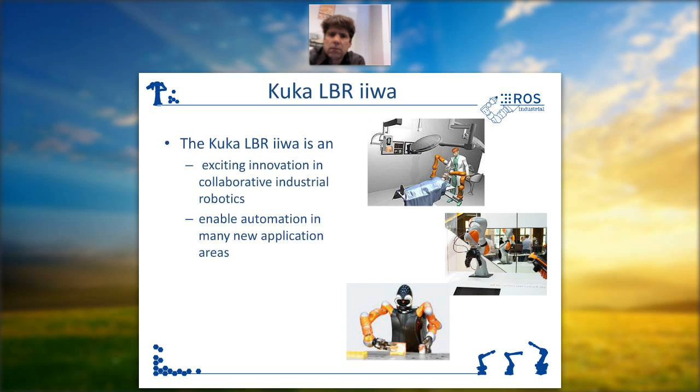So I'm going to give a simple overview of the Kuka robot. Michael will do a better job of this, but I think we can all agree that the Kuka LBR is an exciting innovation in collaborative robotics, which is also an interesting area to be working in.

The idea is that a platform like this can enable so many new applications. It's very exciting. That's the reason we decided to hold this meeting - a lot of people from industry were coming to us saying they think there's a lot this platform can do, but they'd like to learn more, and know if and how ROS-Industrial is involved in that. So it's kind of the motivation for this meeting as well.

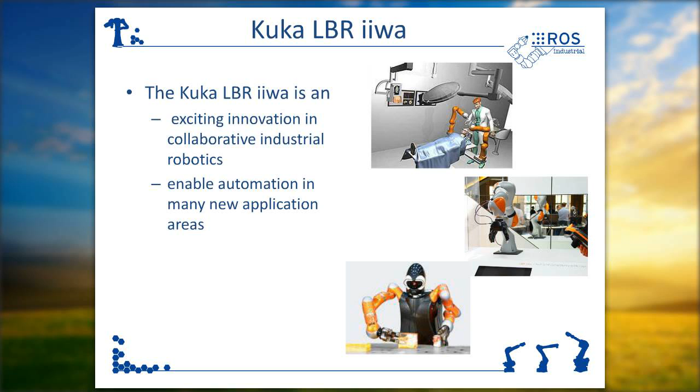But I'm not going to go too much into it because, quite frankly, I don't know all the details of the LBR platform as well as Michael does. So just so everybody knows, this is the platform we're focusing on.

So with that, I'm going to turn the discussion over to Michael, and I assume Clay is going to handle that for me.

Okay, am I live? You're live, Michael. You should have control of the slides also. Oh, how do I do that? There should be little next and previous buttons. If not, I'll change the slides for you. Okay, yeah, I'm not seeing next and previous. Oops, hold on. Oh, maybe now. And I was just informed that I am now a presenter.

Well, after the introduction, I need to have a brief apology because I'm not sure that everything you were told I'm going to talk about is what I'm going to talk about. What I prepared for today was a talk that basically describes a lot of the interfaces available on the Kuka lightweight robot. I was tailoring it to how you might make use of some of those interfaces to fit into a ROS environment.

I'd like to know right from the start - I prepared both for the LBR 4 Plus, which is the robot on the left, as well as for the new LBR iiwa. If nobody's interested in the 4+, I can skip right to the iiwa part. So could we somehow choose which way I should go?

I think the priority would be on the iiwa, just given that that's the platform that's going to move forward for industry use. Okay, all right. Well, maybe what I'll do is just flip through the slides and point out anything on the 4+ that's particularly important.

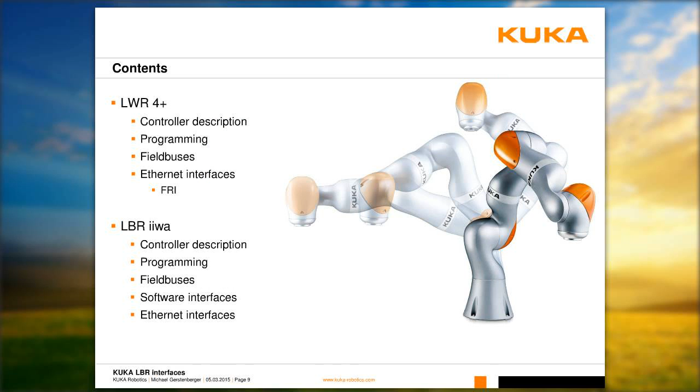All right, so this talk is structured first going through the 4+ and then the iiwa - a brief description of the controller platforms, then the programming languages, a list of the field buses supported on each platform, and then some of the Ethernet interfaces available on the 4+, followed by the software interfaces available on the iiwa.

So for the 4+, if you have a predominantly orange robot, that's a 4+ or before. If it's mostly silver with orange caps, it's a new iiwa, and if it's a white one, it's medical, which is also probably an iiwa.

This robot controller was based on our old KRC, based on that generation of controller hardware, the KRC2, and it made use of all the infrastructure that was already available. One issue was that doing things like impedance control, the main new feature of the LBR, was kind of a kludged-on add-on to how you normally did an industrial robot.

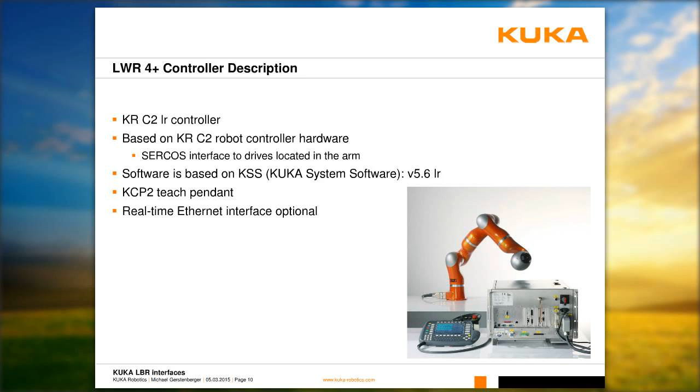As we'll see when we go through the iiwa, that software platform has been completely redesigned and is now a much more integrated system. The 4+ was programmed in KRL, and made use of system variables and data structures for accessing the special features of the LBR.

There was limited expandability, although there was a package called the Robot Sensor Interface, which allowed you to do real-time sensor control on the controller. It's a little bit like LabVIEW that runs directly on the robot controller.

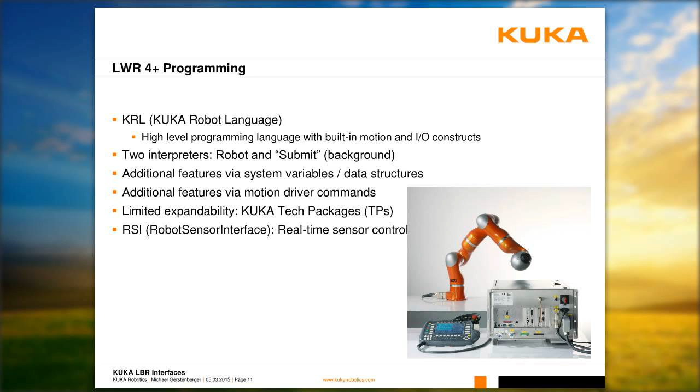Field buses that we supported on the 4+: DeviceNet was standard. You could get Profibus as optional, and if you wanted to do anything else, you needed to get your own bridge from one of those two networks.

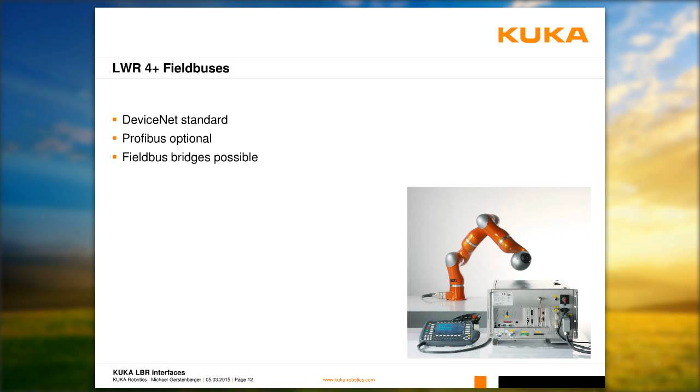Ethernet interfaces let you always access the Windows side of the controller from your network, so for things like file sharing and file transfers, that was available. We also had real-time software for communicating directly to your KRL program, and within the RSI framework, we had an Ethernet object that could stream data into and out of the controller. But most people, when they wanted to do any kind of streaming like that, ended up choosing the Fast Research Interface, which was designed specifically for the lightweight robot.

More on that coming up. So FRI was implemented using Ethernet UDP packets, and it provides a hard real-time interface to the controller. It allows you to directly access the motion system. The update rate could be as fast as 1 millisecond, and the slowest that we allowed was 100 milliseconds. It had two different modes.

Monitor mode allowed you to stream data out to a remote computer for logging or whatever purpose. Control mode actually allowed you to change the commands going to the robot, either joint angles or Cartesian positions, as well as additional joint torques or additional Cartesian force torque vectors. You could also change the impedance parameters every tick, so if you wanted to change impedance at a 1 millisecond update rate, that was possible.

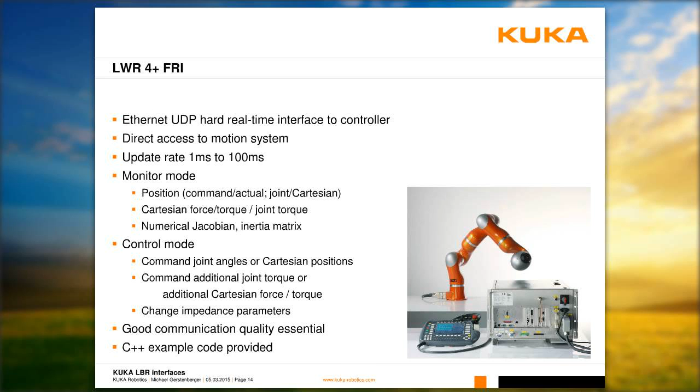As usual with a real-time or hard real-time system, good communication quality was essential, and we took steps to ensure there was good quality of the communication channel. We also provided some C++ example code, although that was just an example. I would not recommend it, since it was written for Visual Studio, in a hard real-time environment.

So what's different on the LBR iiwa? Well, the controller itself is completely new. It's not even called a KRC anymore, it's called the Sunrise controller. It's based on the other controller hardware that we have for our other new robots, the KRC4. It's a little bit smaller than the KRC4 Compact, which runs our small Agilus line, and that's because the drives are not in the box anymore. Unlike they are for the Agilus, the drives are actually inside the arm, so that makes the box a little bit smaller.

As I mentioned earlier, the software is completely rewritten, and it's called Sunrise.os. The teach pendant for this system is the standard smart pad that we use on our other robots, but if you've had a chance to use it, you'll see that the HMI is completely redesigned as well.

So how do you program it? This is another major change in how Kuka does robot programming. There is no programming on the robot controller anymore. All of your programming is done using a package we call Sunrise Workbench, installed on your computer. It's based on the Eclipse IDE, although there are some customizations, so if you really want full functionality, you should run it on a Windows machine. We've had some people try running it on a Mac, and there are some limitations there.

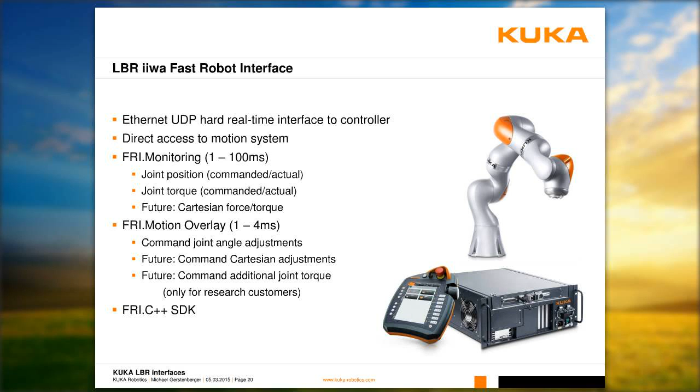The commanding side is now called FRI.motion overlay, intended to be used at 1 to 4 millisecond update rate. Currently you can command joint angle adjustments, and coming soon you'll be able to command Cartesian adjustments as well as additional torque, although that's only intended for research customers. Another component of FRI will be the C++ software development kit, basically like the example library we provided for the old FRI - a development kit for your remote computer to access FRI on the controller.

Okay, how are we doing on time, Sean? Looks like we got 10 more minutes.

So shall we check out some of these application videos? Yeah, we got 10 minutes.

There was one question about CodeBridge from Christoph, asking if CodeBridge was in the 1.51 release. I believe so. Actually, I'm just bringing up 151 on my computer right now to see if it's in the option list. There is, in the software option list for 151, a section called Tutorials for CodeBridge, so that makes me think it's included there.

Hi, this is Phil Freeman from Boeing. Curious, we'll be getting our iiwa here next week, I think. I requested some of the documentation and got the Sunrise OS documentation. How do we get the connectivity documentation and fast robot interface documentation? Should that be part of it, or will it be delivered with the robot? Do you know? It should have been part of it.

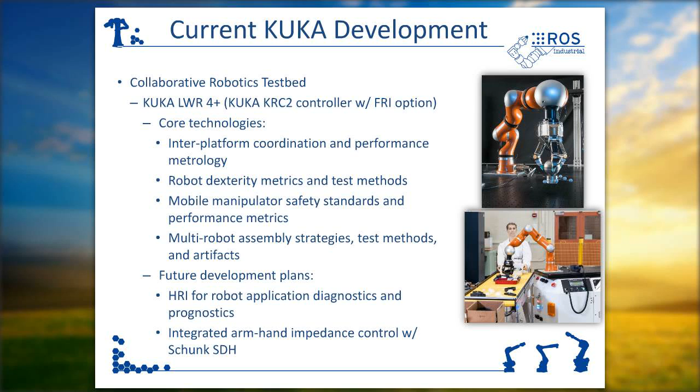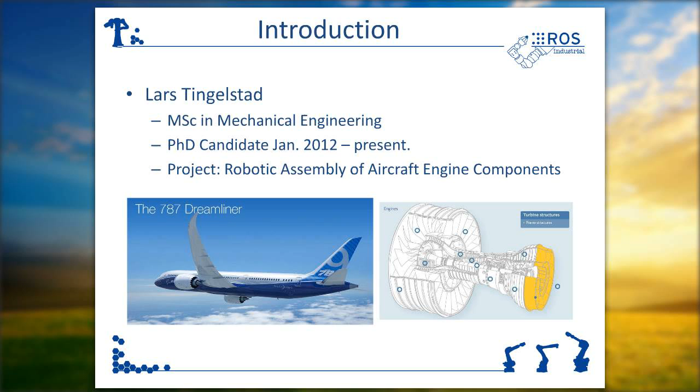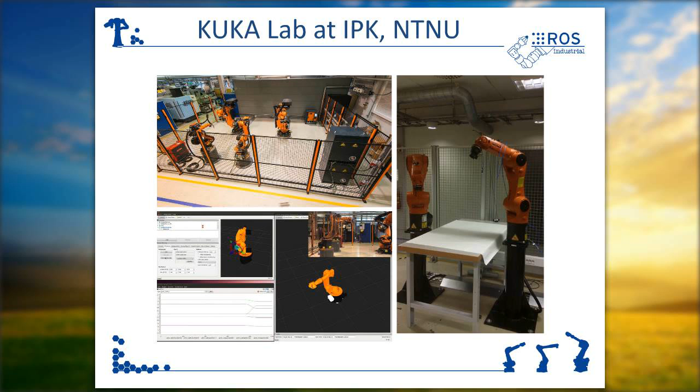So as I said, we have two Kuka KR120 R2500 Pro Quantec robots, the KR16 and the KR5, and then the Agilus robots. We use these robots for manufacturing purposes, typically assembly, welding automation in aerospace, automotive, subsea, and offshore industry, which is the main industries in Norway, as well as more traditional land-based industry like machine tending and those kinds of tasks.

The main thing I've been developing and trying to contribute to ROS-Industrial is the Kuka ROS-I driver, which I hope many will see the need for. It's based on a ROS control hardware interface implementation, plus support packages, URDFs, and MoveIt packages for our robots. The support package for the KR120 is already merged into the Kuka experimental package on GitHub, and the ROS-I driver is currently being tested and developed, living in a pull request you can see in the link. The goal is to get it rigorously tested in our labs and merged into Kuka experimental before summer this year.

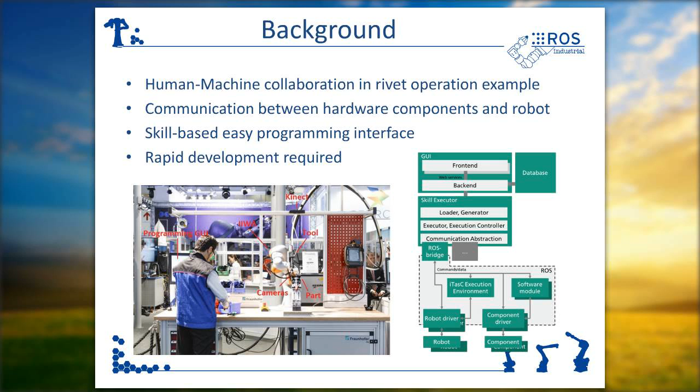Then the robot moves according to the position of the part. With two stereo cameras, we do a fine localization from the hole, and then we perform a riveting operation. So this is everything integrated in a framework, and the idea is that a normal worker can easily and fast program this system, with different robots and components, and the integration will be fast and cheap.

So we can go to the next slide. What I already developed is, in the iiwa part, a Java application which does an interface for a ROS node.

We have this command line interpreter. We send easy commands and we return the answer from this Java program. So it's like a normal TCP socket.

As Michael already commented, the iiwa has different controlling modes. I've already used the 4 different control modes, the normal control mode, but we had a problem: the frequency is very low and we cannot use it for reactive operations. So we already integrate the impedance controlling in the whole process, and we use the SmartServo and DirectServo mode to control, for example, a PID controlling.

So right now it's in C++, the ROS node program, and we have different interfaces, different topics, and we can also control everything with a self-defined ROS action.

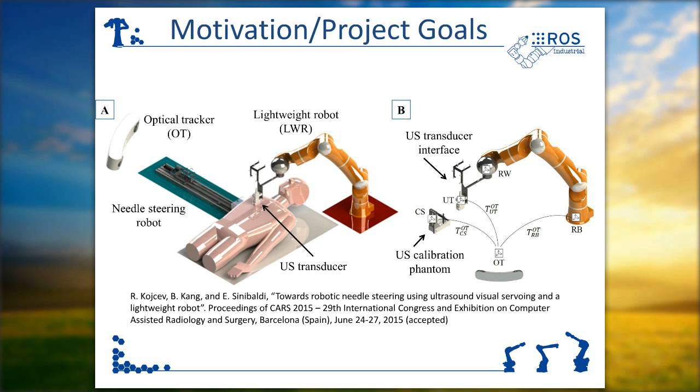This is seen in picture B, basically how the ultrasound calibration is performed. It's the ultrasound attached to the robot, and we have an N calibration phantom. For this, we used an open source software called Plus, developed by Queen's University, the PerkLab in Ontario, Canada, which enables us to use this robot to calibrate these ultrasound images.

By using this Kuka robot, we have better volume compounding compared to freehand calibration, because we are able to control the movement during the calibration, which is essential to minimize the error.

For example, during freehand calibration, we could get 0.6 millimeter reprojection error, while by using a robot we get a 0.4 millimeter reprojection error, which is very good for our application, because we have to precisely locate the target for the flexible instrument to reach.

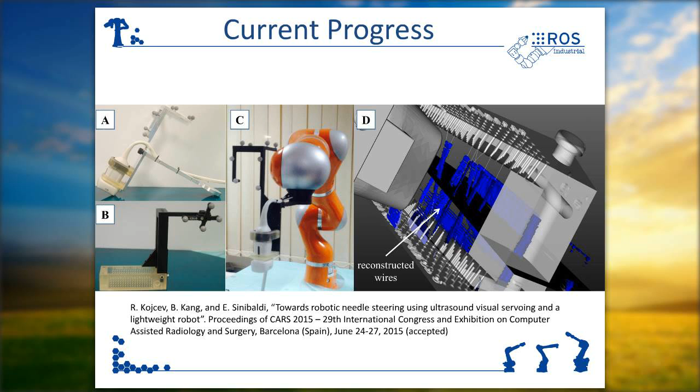This is very short, my presentation, because it's in a very early stage of development, so more will come. I haven't used ROS yet - I'm still thinking whether to use it or not. I already tried the Centro Piaggio guys' package for the Kuka lightweight robot a month ago or so, and it seemed to work, but I haven't tested it thoroughly. So I'm still thinking whether ROS can be used for my application or not. It has great potential, but I still have to look a little more into this.

Thank you. All right, thanks, Risto. I think medical applications are really cool, and the Kuka robot's capabilities are going to be very useful for that. So I'd like to encourage all the developers to cooperate as much as they can.